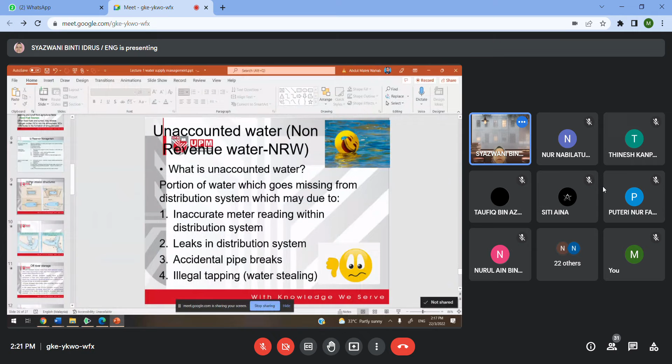Okay. All right. So we are going to look again into the overview of this course. Before we go further, I would like to share a video on one of the common technologies being used for advanced treatment, which is known as a membrane bioreactor.

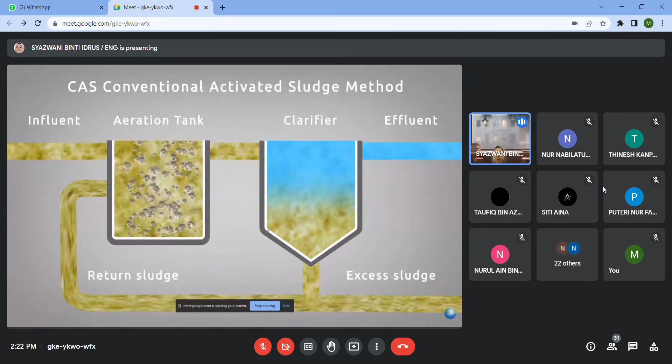Membrane Bioreactor, MBR. The Membrane Bioreactor, MBR, has a number of advantages over traditional wastewater treatment. In the conventional activated sludge treatment method, sludge is separated into solids and liquid in a settling tank. This is called clarification. The innovative MBR technology combines activated sludge treatment with solid liquid separation by means of microporous membranes, in place of the traditional separation by secondary clarification. The MBR modules can be put in a separated tank after the oxidation tank. This configuration is called standard system. The MBR modules can also be put directly in the oxidation tank. This configuration is called compact system.

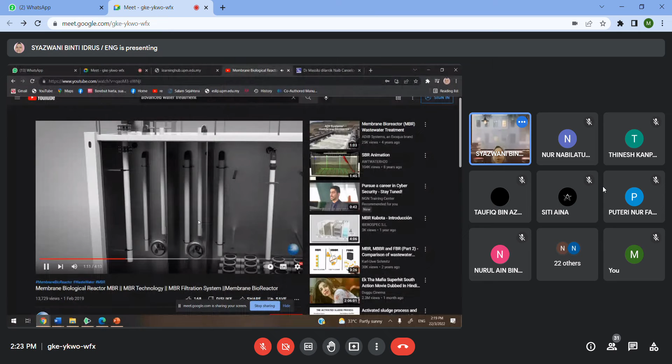The MBR process delivers a highly treated effluent suitable for non-potable reuse applications. The MBR system can be rearranged in a variety of configurations. The typical MBR system includes a rotary influent screen and anoxic, anaerobic, and aerobic tanks for biological treatment, the MBR modules and MBR tank, air blowers for the aeration process and for membrane scouring, a pump set for the MBR permeate suction for sludge recirculation, chemical dosing systems.

Okay, so if we go back to this slide, we can see that this is a conventional treatment method, known as the conventional activated sludge process, the one that you studied in your third year. So, very quick revision, this system comprises an aeration tank as well as the clarifier. These are the secondary treatment processes where you employ the return activated sludge. In the advanced version of this system, they equip it with the membrane bioreactor.

A membrane bioreactor can exist as a submerged system like this, or as a separate system where it is not submerged inside the tank. So this is one of the innovations that have been explored, so that having the membrane inside the tank will improve the quality of the treated wastewater, as well as reduce the suspended solids.

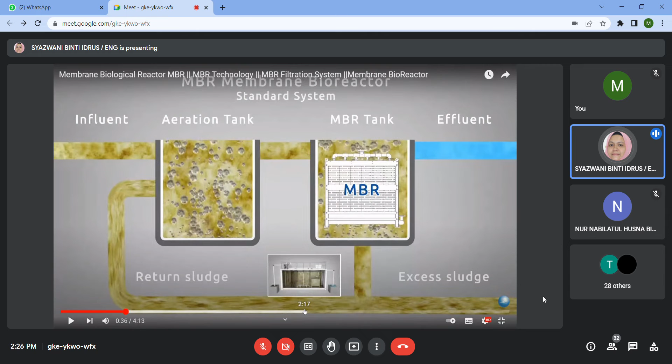Okay, let's see. Let's see what the membrane system actually is.

Conventional activated sludge processes. Flat sheet MBR membrane modules are fully submerged into the mixed liquor inside the tank for direct outside to inside filtration. The modules are made of robust reinforced flat sheet membrane with a nominal pore size of 0.04 micrometer. The membrane separates solids and microbes from the activated sludge. The module aeration system generates an upward water flow and air flux to prevent membrane fouling. This allows extreme efficiency up to 99% in suspended solids removal, delivering highly treated.

So this is the cross section. The one in white is the membrane sheet. When we employ a membrane, the membrane sheet acts like a filter, but with very small pores, so that it can remove not only the suspended solids but also the dissolved solids. The one that we filter out is known as the permeate.

Permeate is the filtered water, the treated water, while the one that cannot pass through the membrane sheet is known as retentate or the concentrate. So later we shall have about 2 weeks of lectures to study only the membrane technology, because the topic is pretty long compared to other topics, but not only on membrane.

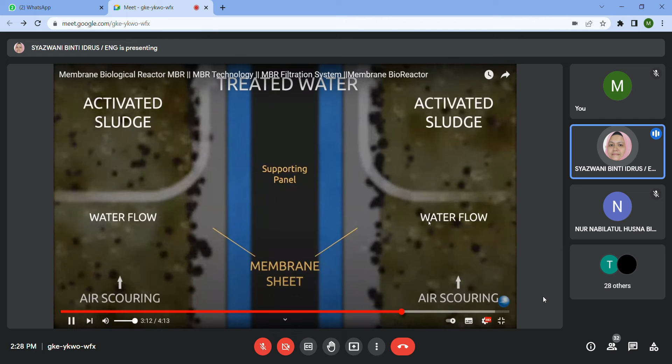Water suitable for reuse. MBR technology offers a number of key advantages over conventional wastewater treatment plants. By eliminating the need for secondary clarifiers and tertiary treatment, a smaller footprint is possible. Higher strength effluents can also be treated. MBR membrane technology produces an improved water quality in the treated water versus conventional activated sludge treatment systems. This not only helps ensure that specific effluent discharge limits are met, but also gives the customer the potential to

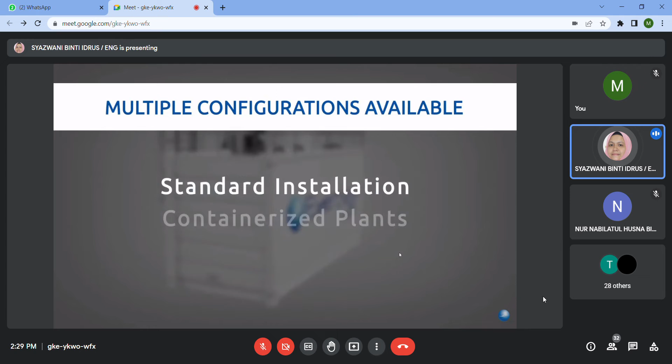reuse the water. In addition to standard installations, MBR systems are available in a wide range of configurations designed to meet your specific needs, such as containerized solutions for remote sites, or retrofit systems to enhance the performance of existing treatment plants. Membrane bioreactor systems offer the latest technological solution to meet your wastewater and water reuse needs.

Okay. Another one is known as moving bed bioreactor. We have studied this before during the 3rd year.

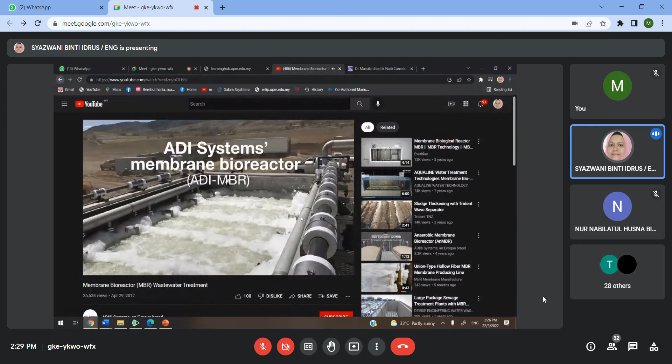Okay. There are three different systems: MBR, MBBR, and FBR. The comparison of the three systems showed different advantages and disadvantages for industrial wastewater applications. Effluent water quality. MBRs show in general a slightly better BOD removal than MBBRs or FBRs. Very fine membranes can even hold back germs so that the water effluent quality is in general better.

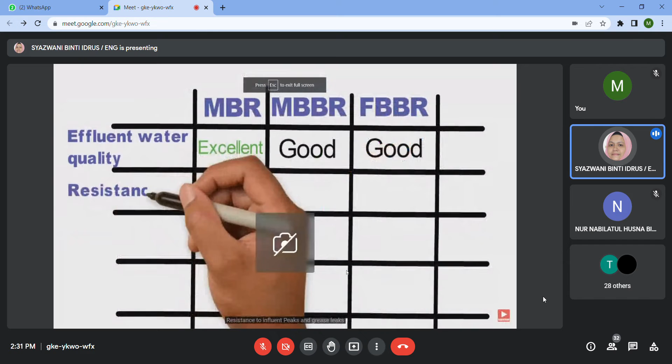Resistance to influent peaks and grease leaks. MBRs are very sensitive to changing influent values. Grease leaks can cause clogging of the fine membranes so that they must be cleaned or replaced. MBBRs are less sensitive than MBRs, although the risk of fill media clogging is high in case of interrupted mixing and grease leaks. Instead, FBRs are very robust and show a very good handling of changing influent values, grease leaks, and interrupted oxygen supply.

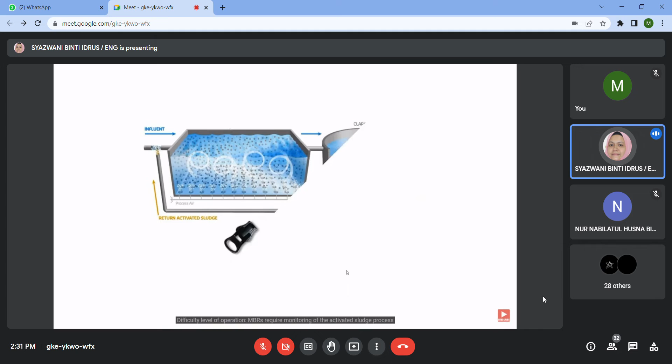Difficulty level of operation. MBRs require monitoring of the activated sludge process as well as backwashing of the membranes in certain intervals. Therefore, their operation can be challenging and higher qualifications are necessary. MBBRs and FBRs are more forgiving, and especially FBRs are easy to operate. Required space. The higher MLSS level of MBRs allows more BOD removal per water volume. Therefore, their required space is lower compared to MBBRs and FBBRs.

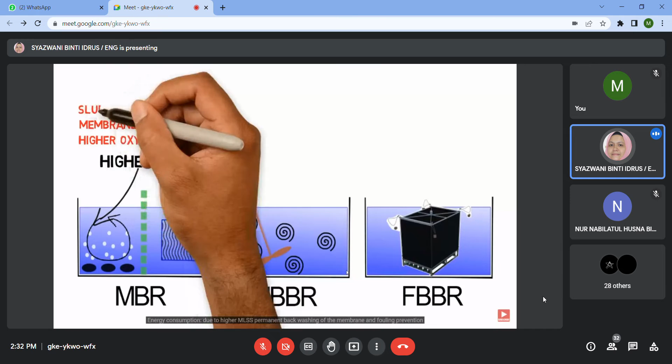Energy consumption. Due to higher MLSS, permanent backwashing of the membrane and fouling prevention, MBRs need a high air volume, thus have a high energy demand and cost. FBRs require less energy than MBBRs because the air supply of the biofilm is installed directly underneath the fill media, which results in a better oxygen intake. Overall cost. The installation costs for all three systems are about the same. However, over time, MBRs are more expensive than MBBRs and FBBRs because of higher operational and maintenance costs.

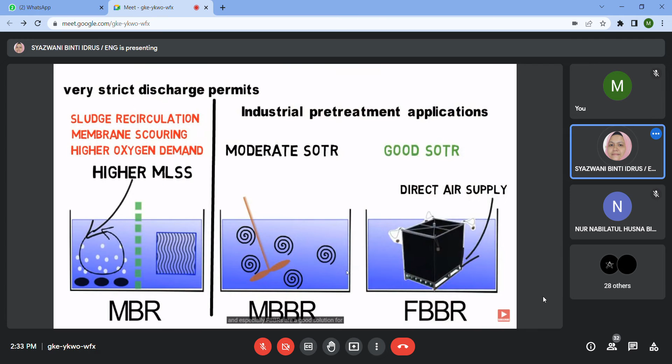All in all, MBRs are a good fit for applications that require a high-quality water effluent. Instead, MBBRs and especially FBBRs are a good solution for pre-treatment of high BOD levels. Their resistance and forgiving design make them suitable for various industrial wastewater applications. Additionally, the easy operation and maintenance guarantee a long lifetime production solution for low cost in the long term.

In case you wish further information or need support with the design of your project, please contact us. Thanks for watching.

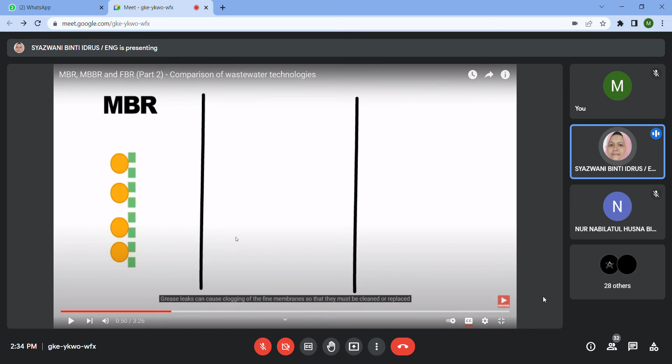So this is one of the best videos, where it compares the three innovations in wastewater treatment technologies. The first one is membrane bioreactor. The second one is moving bed bioreactor, and the third one is fixed bed bioreactor. So what are the major differences? First, we look into the configuration. In terms of configuration and the material used, membrane bioreactor, of course, employs membrane technology.

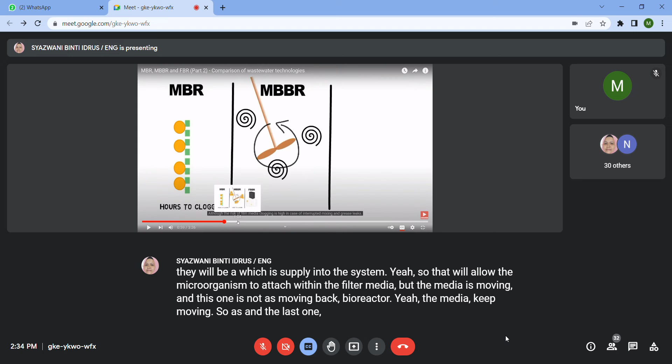The second one is moving bed bioreactor. Moving bed bioreactor doesn't employ membrane; it employs a filter system where at the same time air is supplied into the system. So that will allow the microorganisms to attach within the filter media, but the media is moving. That's why it's known as moving bed bioreactor. The media keeps moving. And the last one is fixed bed bioreactor. Fixed bed bioreactor is a system where the media is not moving.

We culture the microbes within the media, but the media is fixed to a certain place. So as you can see, for the membrane bioreactor, it took hours to cause clogging. For the moving bed bioreactor, in less than one day it will cause clogging. For the fixed bed bioreactor, it will take a few days.

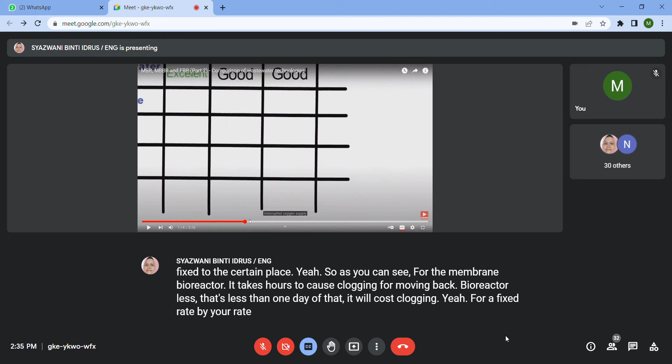Okay, in terms of quality, the membrane bioreactor will produce excellent quality of water as compared to MBBR and FBBR. In terms of resistance, when maintenance is required, the best one is the fixed bed bioreactor. And until now, membrane technology is one of the technologies that can produce a very good quality of water as well as treated wastewater.

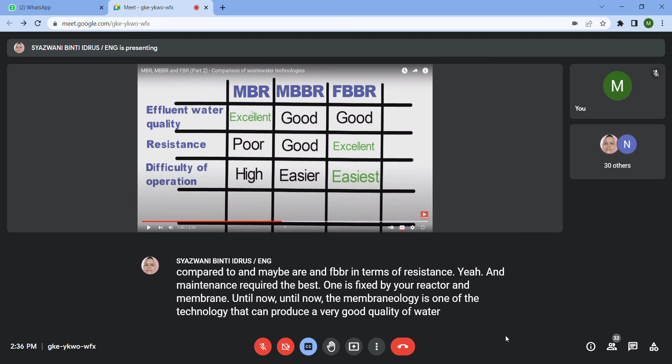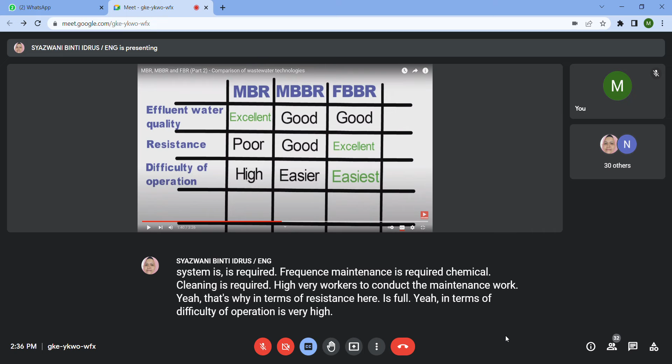Nevertheless, the major disadvantages of employing this system are that it requires frequent maintenance, requires chemical cleaning, and requires very highly trained workers to conduct the maintenance work. That's why in terms of resistance here it is poor. In terms of difficulty of operation, it is very high. It requires a very highly trained person, then only the maintenance work can be conducted.

In fact, at a certain period we have to use chemical cleaning, then only we can remove the pollutants or contaminants that stick within the pore surface of the membrane. Because as I mentioned to you just now, a membrane works like a filter. Jadi macam penapis tu, it's like a filter. So after a few rounds, the contaminants will start to stick on the surface of the membrane. So that's where it requires maintenance.

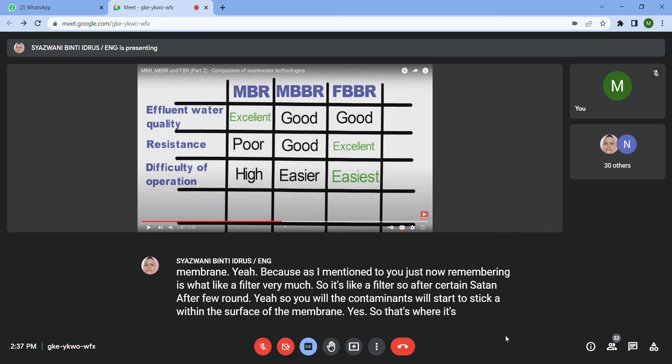As compared to that, MBBR and FBBR are very easy. They are the easiest ones in terms of operation and resistance.

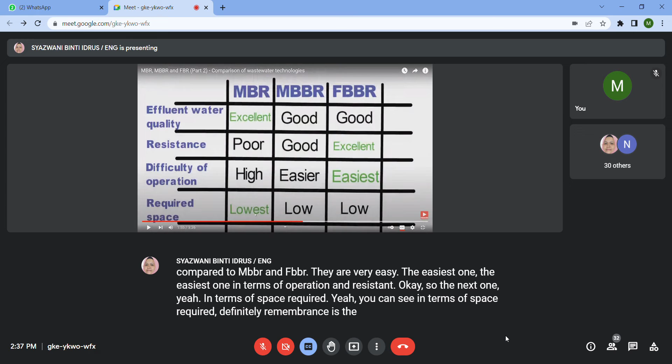Okay, so the next one, in terms of space required, definitely membrane is the lowest one. Comparing between the three technologies available here, the membrane requires the lowest space. But still, because these are advanced technologies, the conventional activated sludge system is still the technology that requires the highest space if we employ the conventional methods.

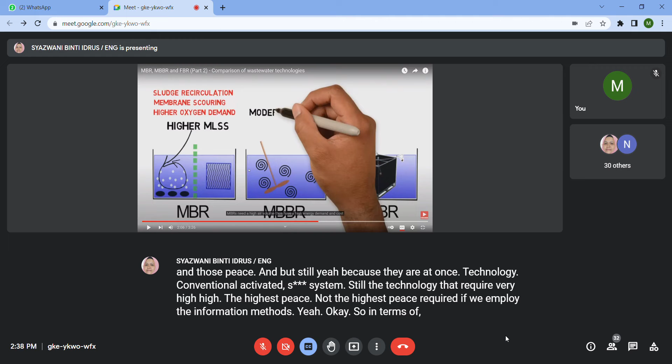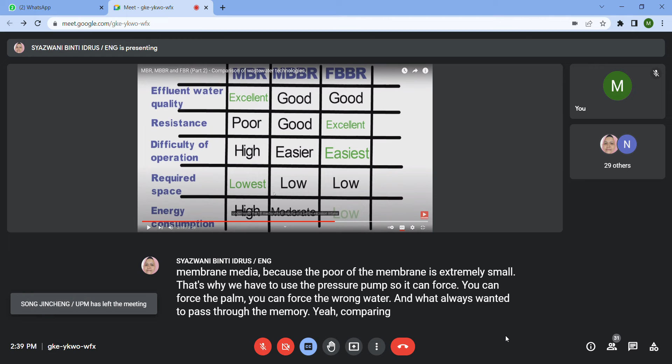Okay. So in terms of energy demand, if we compare energy consumption, membrane requires high energy consumption. You know why? Because when we employ membrane, we have to use a pressure pump. Otherwise, the raw water or raw wastewater cannot pass through the membrane media because the pore of the membrane is extremely small. That's why we have to use the pressure pump so that it can force the raw water or untreated wastewater to pass through the membrane. Compared with MBBR and FBBR, membrane is the highest one in terms of energy consumption.

So this is the overview. We are going to compare in detail. So by the end of this course, you should be able to give the right recommendation based on the existing problem, based on the constituents of the raw water and wastewater to be treated. Okay, all right.

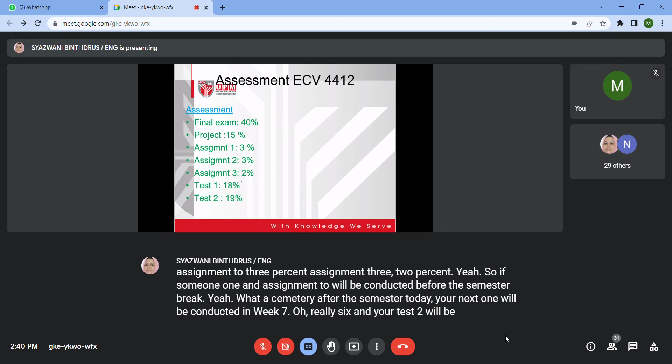In terms of assessment in this subject, we are going to have a final exam, 40%, and a project, 15%, only one project. Assignment 1, 3%. Assignment 2, 3%. Assignment 3, 2%. Assignment 1 and assignment 2 will be conducted before the semester break, while assignment 3 after the semester break. Your test 1 will be conducted in week 6 or week 7, and your test 2 will be conducted in week 11 or week 12. Okay.

So today I'm going to pass you your first assignment. Okay, so a general overview of the reservoir management system. We are looking into the quality. Why we have to care about reservoir management is because we hope that we can preserve the quality of water, not only the quality but also the quantity.

So this is our challenge, your challenge as a future civil engineer, future water engineer, as well as environmental engineer, to look into this issue, so that proper management reduces the impact on the environment and we can preserve the quality of the water.

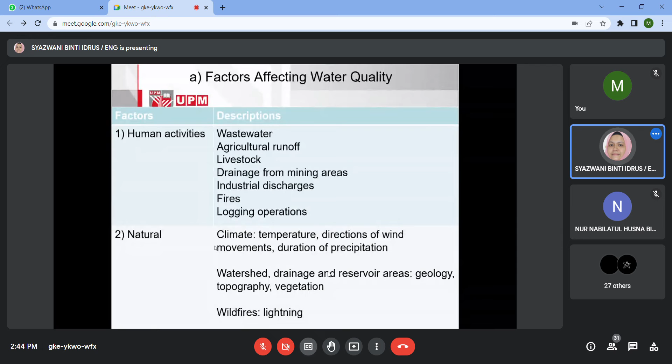Okay, eutrophication is another issue, which relates to nitrogen which we have discussed before, including the nitrogen cycle. The factors that contribute to nitrogen include runoff from agricultural activities, septic tanks, and the residential area. For your information, there are three major elements that can cause eutrophication.

These can enhance the development of eutrophication. The first one is nitrogen, the second is phosphorus, the third is potassium. But this will only happen at the right ratio. Phosphorus is the limiting factor, the major element which can cause eutrophication, the algal bloom. But only at the right ratio to nitrogen can it produce the eutrophication or algal bloom situation.

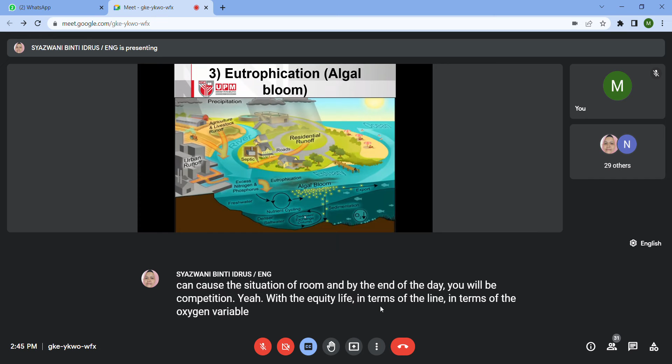So why do we need to put concern on eutrophication? Eutrophication can cause algal bloom situations, and by the end of the day, there will be competition with aquatic life in terms of light and oxygen available in water bodies. That's why runoff, especially from agriculture, is the toughest one, because it contains high potassium, nitrogen and phosphorus from fertilizer.

Apart from that, there's the urban and industrial source, the management of industrial wastewater, the management of slaughterhouse wastewater. What is the current practice of slaughterhouse centers in this country? Many of them don't have any specific treatment method. They just allow the untreated slaughterhouse wastewater to flow into the drain and directly into the river.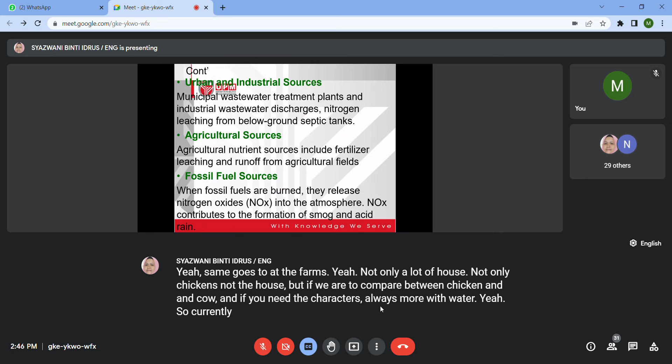Same goes for other farms, not only chicken slaughterhouses but cattle slaughterhouses too, which definitely produce more wastewater compared to chicken. Currently, some of them do have treatment methods, but unfortunately the treatment method only works when there is an inspection from the officer. So this is definitely not a good practice.

The government is also looking forward to allowing food and beverage wastewater to combine with domestic wastewater, so that we can improve the loading rate of domestic wastewater treatment. But they have not yet made the final decision. They are only looking forward to introducing this.

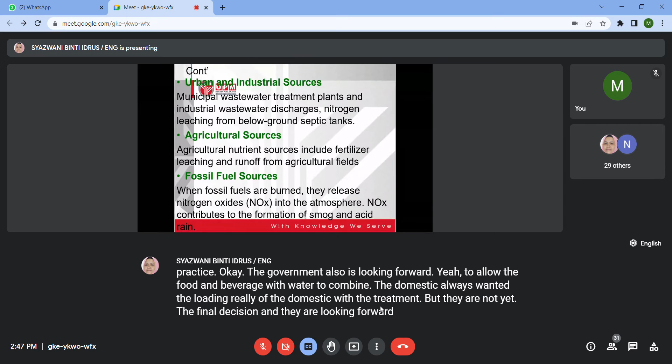Next is regarding reservoir management. We have to provide buffer areas to avoid the cutting of trees and burning processes, so that we can ensure the water security and safety of the reservoir, as well as the source of water. We have to ensure watershed management, avoiding fertilization and industrial discharge, so that we can preserve the quality.

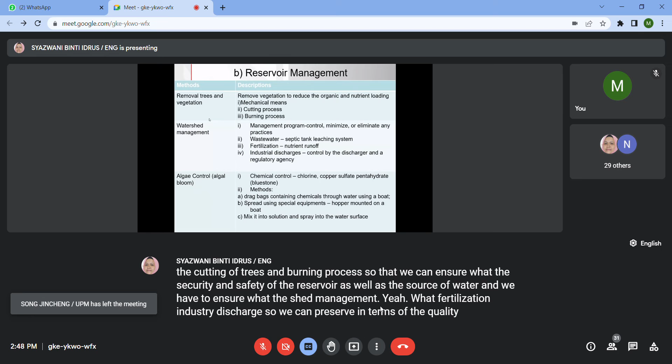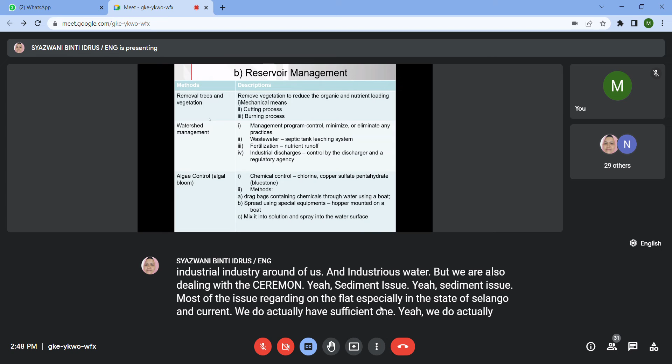There are few factors that can affect the quality of our water storage, not only in terms of industrial runoff and untreated industrial wastewater, but we are also dealing with the sediment issue. Most of the issues regarding flooding, especially in the state of Selangor and Kuala Lumpur, we actually have sufficient ponds to avoid the flooding area.

But due to the inefficient drainage system, due to clogging, this has caused a lot of problems, and the community is the one who has to pay back.

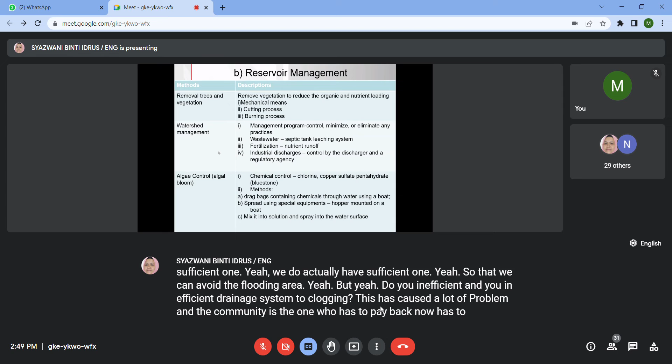Who has to see the damage of the houses due to flood.

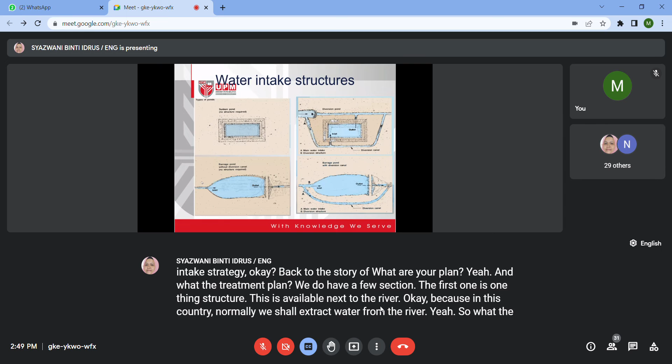Okay, so this is water intake structure. Back to the story of water treatment plant. In water treatment plant, we do have a few sections. The first one is water intake structure. This is available next to the river, because in this country, normally we shall extract water from the river. So water intake structure is normally available next to the river. There are 4 types of water intake structure.

The first one, on my top left, is the sunken pond - no structure required. The next one is with diversion pond. The third one is without the pond but with the diversion. And the last one there is no diversion, only barrage pond.

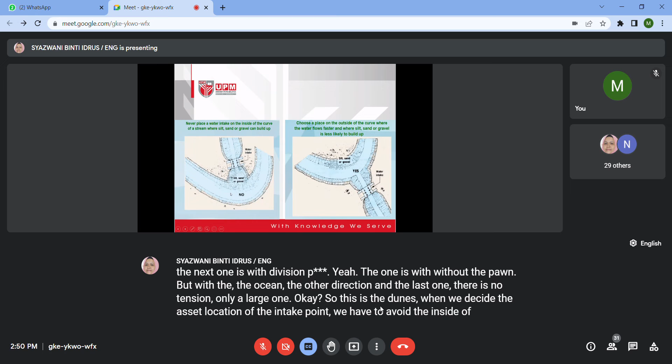Okay, so these are the don'ts. When we decide the exact location of the intake point, we have to avoid the inside of the curve. Why do we have to avoid the inside of the curve? Because this will be the place where the silt, sand and gravel will accumulate. So it's not a good decision to construct a water intake point in the inside of the curve. So imagine this is the river, and this is going to be the water intake point. So these are the recommended points at the right location where you can construct a water intake point.

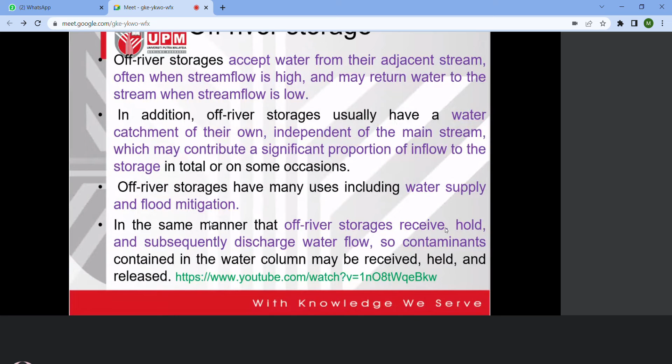Okay, next one is off river storage. Off river storage is the technology or a very good innovation, so that we can preserve the quality of water as well as the quantity of water.

The overview of water treatment system. Today we are not yet into the advanced version, because I think it's better for us to have the overview, and then we can revise what is the water treatment system.

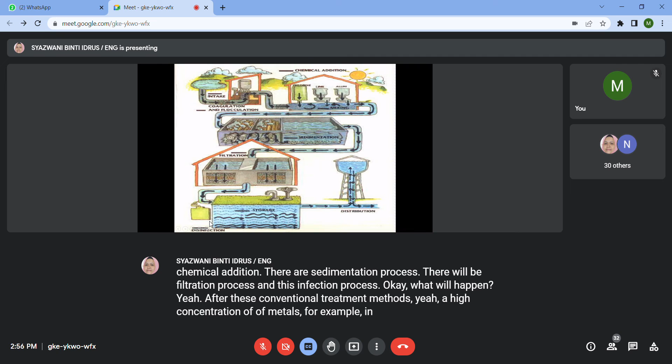These are the overview of the treatment processes which have to be conducted in a conventional treatment system. In a conventional treatment system, there is coagulation and flocculation, chemical addition, sedimentation process, filtration process and disinfection process. What will happen after these conventional treatment methods? There are high concentrations of metals, for example, in treated water. So this is where tertiary treatment or advanced treatment methods are required. So the one that I currently share with you is the conventional treatment process, the most common process that will occur in a conventional treatment plant.

Addition of alum - very quick revision - addition of alum will occur here, so it will form flocs. Flocs will settle to the bottom part. So the role of this stage is to remove the suspended solids.

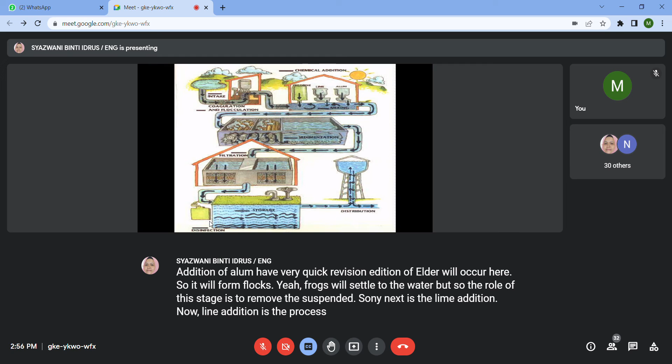Next is the lime addition. Lime addition is the process for adjusting or softening the water. Why do we need to add lime? Because lime can soften the water. Why do we care about softening or hardening the water?

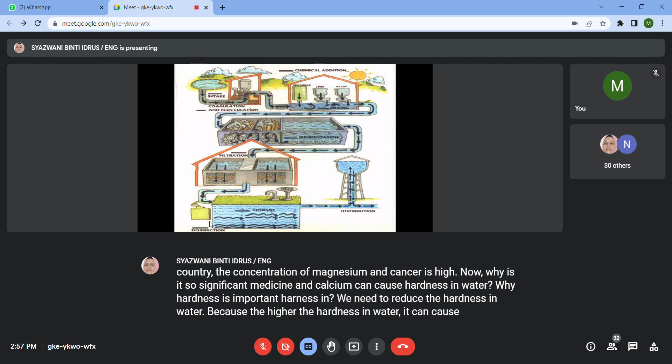Water in this country has a high concentration of magnesium and calcium. Why is it so significant? Magnesium and calcium can cause hardness in water. We need to reduce hardness because the higher the hardness, the higher the soap consumption, and it will take longer to produce bubbles if hardness is too high.

That's why lime is the most common method used, added into the raw water after the coagulation process. We add lime so that the antagonistic effect between the lime and the magnesium and calcium can reduce the hardness of water.

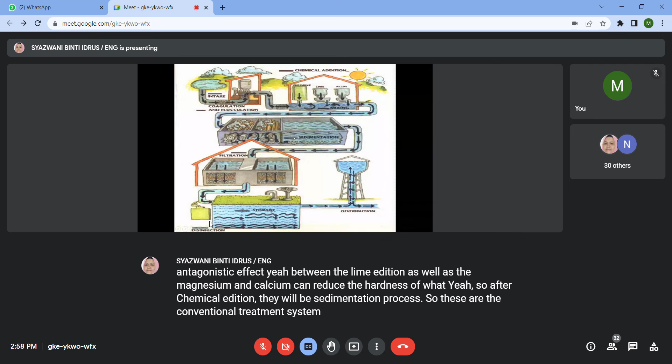After chemical addition, there will be a sedimentation process. In this conventional treatment system, we allow some time for suspended solids to settle to the bottom of the tank. So we have to consider the hydraulic retention time, which is the time we provide for water to stay within the tank without any action, staying calm inside the tank.

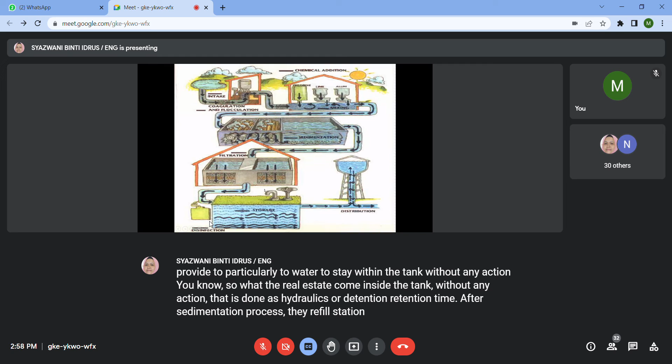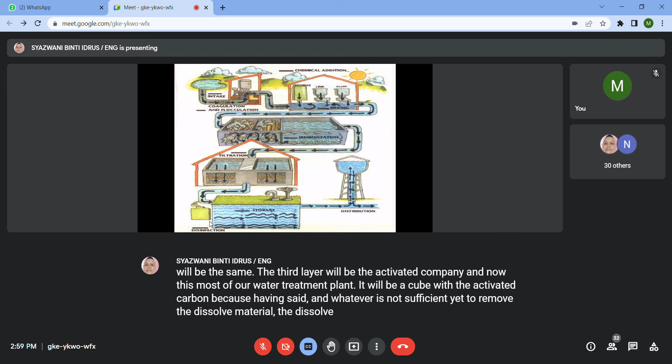After sedimentation, there will be a filtration process. The first, bottom layer is gravel, the next layer is sand, and the third layer is activated carbon. Nowadays, most water treatment plants use activated carbon because sand and gravel alone are not sufficient to remove dissolved material, especially dissolved solids like minerals. Activated carbon is required to adsorb those minerals and ions.

After the filtration process, in this course we shall cover the filtration process in detail, and later I will share with you how to design the activated carbon column filtration.

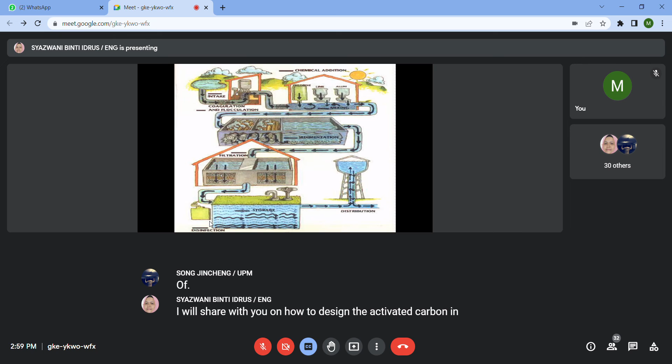After filtration process will be the disinfection process. Disinfection process.

Thank you, Doctor. Do you have any question? No. Okay, all right.

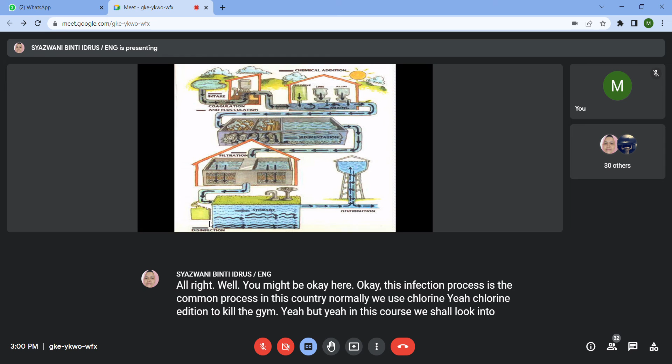Disinfection process is the common process in this country. Normally we use chlorine addition to kill the germs, but in this course we shall look into other methods that can be used to kill germs, not only chlorine addition.

We can also use ozone treatment, or UV treatment, to kill germs after the filtration process. The issue we have to address in this course is what happens after disinfection process, since there are still substances left that require treatment.

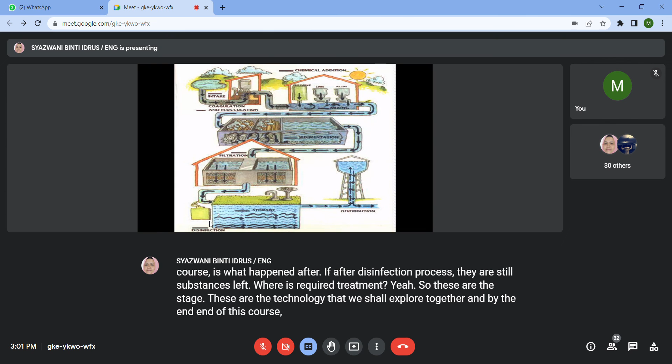These are the stages, the technologies, that we shall explore together, and by the end of this course you should be able to advise people and give recommendations on what is the appropriate technology to use so that we can effectively treat the water.

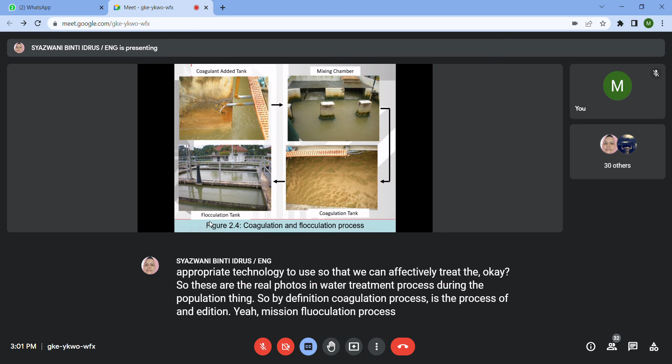These are real photos of the water treatment process during coagulation, in the coagulation tank. By definition, coagulation process is the process of alum or coagulant addition. Flocculation process can be defined as the rapid mixing process, because without rapid mixing, it would be difficult for the alum added earlier to attract the suspended solids to form flocs.

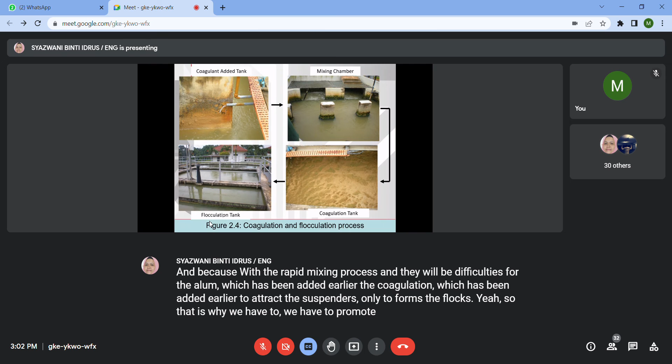That's why we have to promote the formation of the flocs through the mixing process.

Example 1, a simple example for a water treatment plant which treats about 36,000 meter cube per day. Design the volume of the flash mixing tank for flocculation where the detention time is 40 seconds.

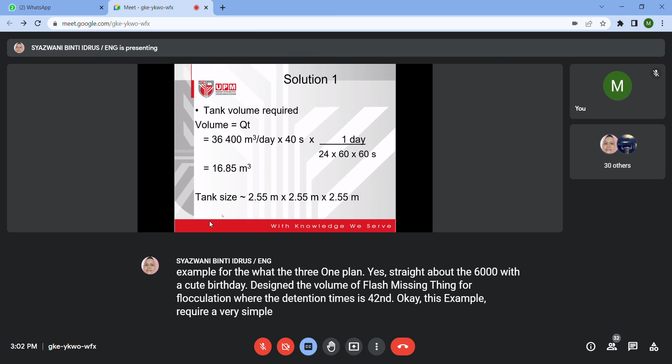This example requires a very simple formula, where flow rate is equal to volume over time. You are given the flow rate and the time, so you are looking for the volume. Solving this equation, you get the volume of about 17 meter cube. These are the proposed dimensions: length, width, and depth.

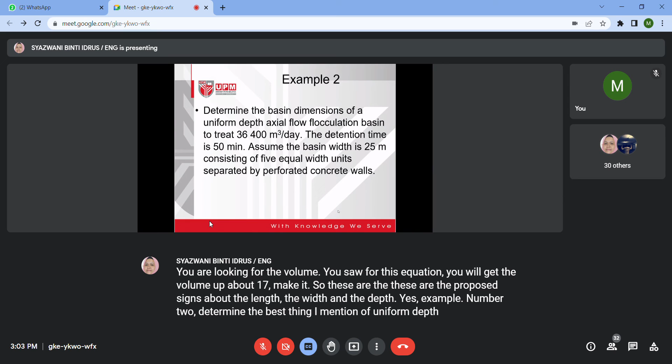Example 2: determine the basin dimensions of a uniform depth axial flow flocculation basin to treat the same flow rate of water, but now the detention time is 50 minutes and the basin width is 25 meters. It also consists of 5 equal width units separated by a concrete wall.

First you need to find the volume based on the given detention time. The detention time is now given as 50 minutes, so this is just a unit conversion, and from that you will get the volume.

Knowing the volume, and you are also being given the width of the basin, so you know that area is equal to volume divided by width, so you will get the area. So the area is the length times the depth. So now you need to propose the depth, say depth is equal to 5 meters. This is a reasonable depth for a tank.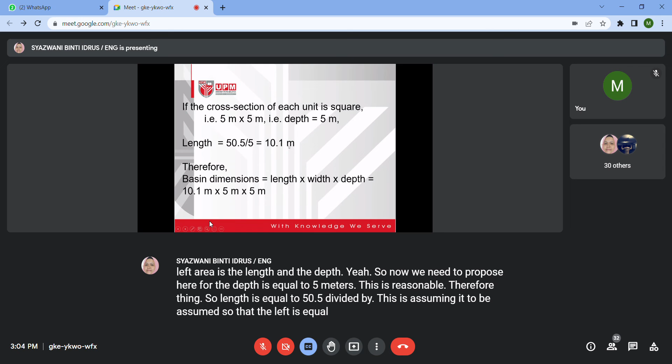So length is equal to 50.5 divided by 5. This is assumed, so the length is equal to 10.1 meters. So therefore the basin dimension, length times width times depth, is equal to 10.1 times 5 times 5. Yeah, very simple.

Okay, this is the revision on how to estimate the population. Estimating the population is extremely important for the design of water and wastewater treatment. Wrong population estimation means that your water treatment and wastewater treatment plant will be under designed or over designed.

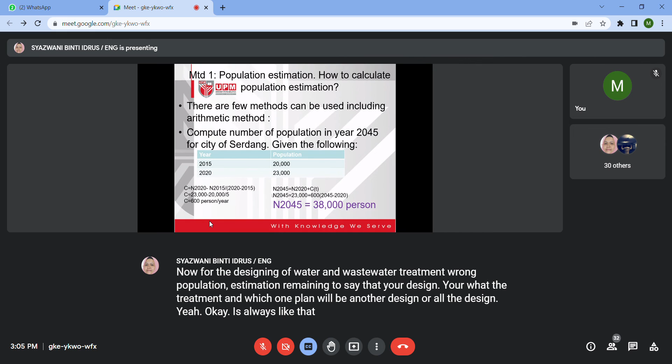It's always like that. Even the treatment plant in Putrajaya, it's been designed for 100,000 population, but it's been 10 years since the operation and it's only 40,000 incoming flow. Okay, so it's always under design.

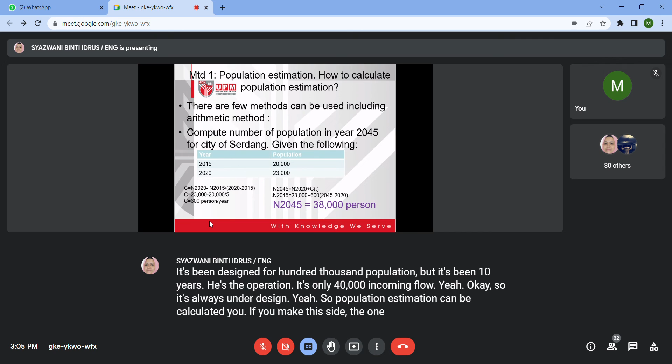So population estimation can be calculated using a few methods. The one that I currently share with you is known as the arithmetic method. Using the arithmetic method, you need to know at least two previous years' population, because you need to know the coefficient. The constant here is important because you need to know the rate of the increment.

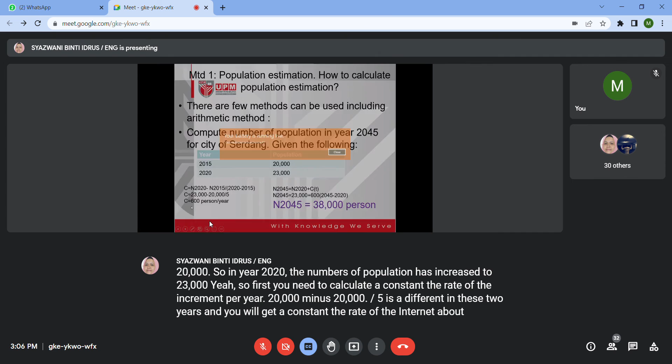For example, in 2015, the population is 20,000. In year 2020, the population has increased to 23,000. So first you need to calculate the constant, the rate of the increment per year: 23,000 minus 20,000 divided by 5. 5 is the difference between these 2 years, and you will get the constant, the rate of the increment, about 600 per year.

Okay, so to calculate the population in 2045, you use the latest population information that you have, plus CT. So N 2020 is 23,000, C is 600, and the difference in terms of years is 25 years. So you know that the population for the city of Serdang in 2045 is equal to 38,000 persons. So this is the first method.

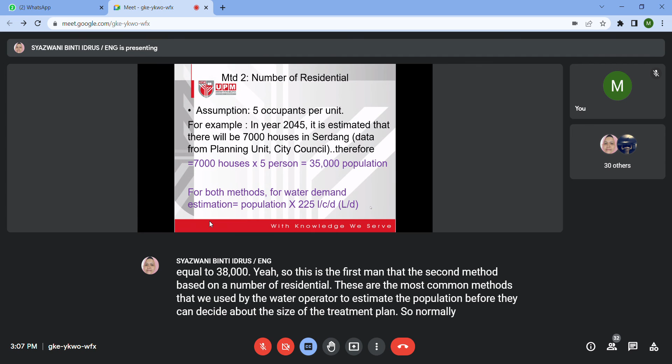The second method is based on the number of residential units. This is the most common method used by the water operator to estimate the population before they decide the size of the treatment plant. Normally they will check in terms of the development, what will be the estimated number of houses after a certain period. For example, if they are designing a water treatment plant for 10 years, they need to know, based on the development plan, what will be the number of houses.

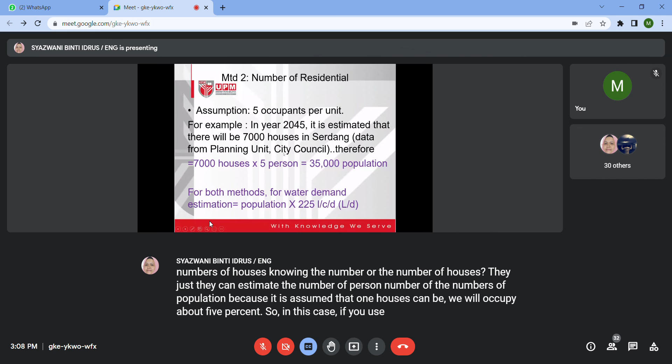Knowing the number of houses, they can estimate the number of persons, the population, because it is assumed that one house will be occupied by about 5 persons. So in this case, using this method, we will get about 35,000 population in 2045, because 7,000 houses times 5.

Okay, for both methods, whether we use the population method or the number of residential units method, water demand estimation is equal to population times 225 liters per capita per day. So this is how to estimate the water demand. These are the fixed numbers to be used, at least at this moment, because these numbers tell us the volume of water consumed per person per day. C stands for capita.

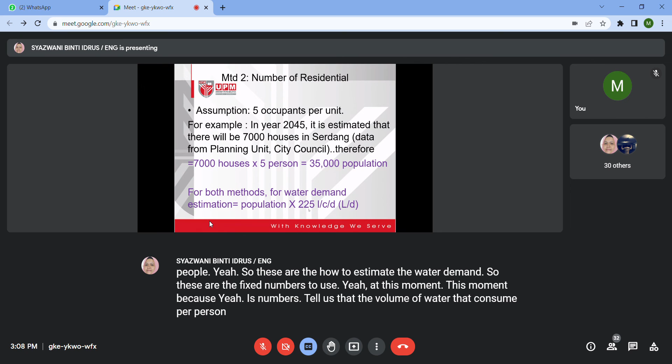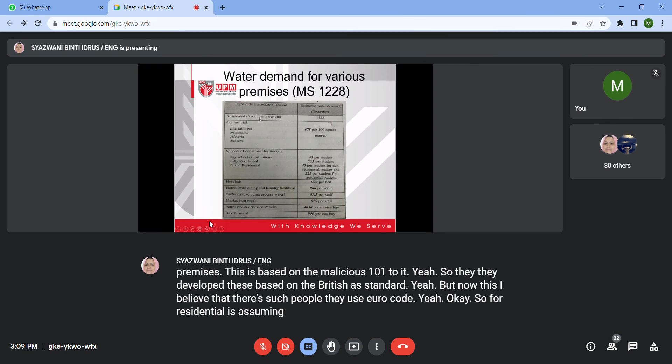Okay, these are the water demands for various premises. This is based on the Malaysian Standard 1228. They developed this based on the British standard, but now I believe the structural people use the Eurocode. Okay, so for residential it is assumed 5 occupants per unit. For commercial areas it is based on the area.

So 675 liters per 100 square meters. Okay, this is 675 liters. For schools, full residential will be 225, for those who stay in the asrama. For half day school it is about 45 liters per student.

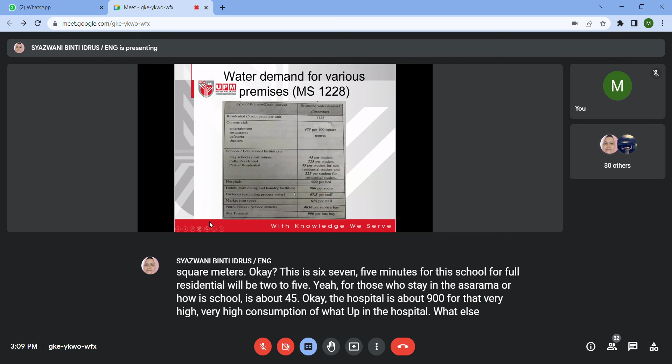Okay, so for hospitals it is about 900 per bed. Very high consumption of water in the hospital. Hotels about 900 per room. Factories about 68 per staff. And the bus terminal is about 900 per bus bay. So this is how to estimate the water demand.

That's why they need to know the plan for the development, because knowing the plan for the development will help the water operator to estimate the volume of treated water required to be supplied to the consumer, so that they can build a suitable size for the water treatment plant.

Okay, this is the story about unaccounted water. What is unaccounted water? Unaccounted water is also known as non-revenue water. How do they know they have the issue of non-revenue water? For the water operator, when they release the treated water, they know this is the volume. But when they check with the billing system, the volume of the water used by the registered consumers does not tally with the water released from the water treatment plant.

The billing does not tally with the water released from the water treatment plant. So it must be missing somewhere. This is known as non-revenue water. This is not only a problem in this country. The issue happens all over the world.

But recently, I had one master's by coursework student. He is actually a staff member at Air Selangor. He did a short study on this issue, and he found that number 2 and number 3 are the major factors contributing to non-revenue water: the second one is leaks in the distribution system, and the third one is accidental pipe breaks.

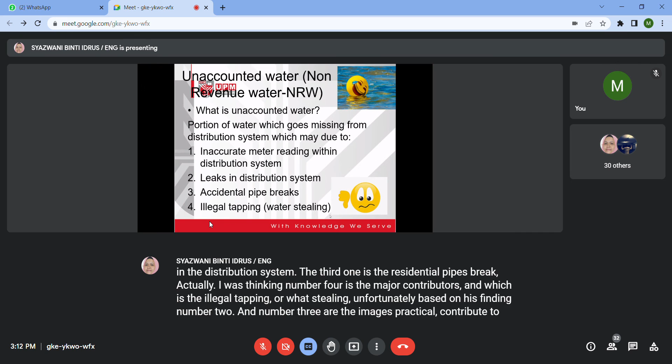Actually, I was thinking number 4 is the major contributor, which is illegal tapping or water stealing. Unfortunately, based on his finding, number 2 and number 3 are the major factors contributing to non-revenue water. Actually, we have 4 major factors, but number 2 and number 3 are the major contributors to unaccounted water. Okay, all right.

Here, I would like to open the discussion. I have 6 topics here, and maybe we can spend about 15 minutes to discuss this, only to address the point. How many of you? Currently, we have 31 students and we have 6 topics here. 30 divided by 6, 5. Okay. Can we have 5 or 6 students per group?

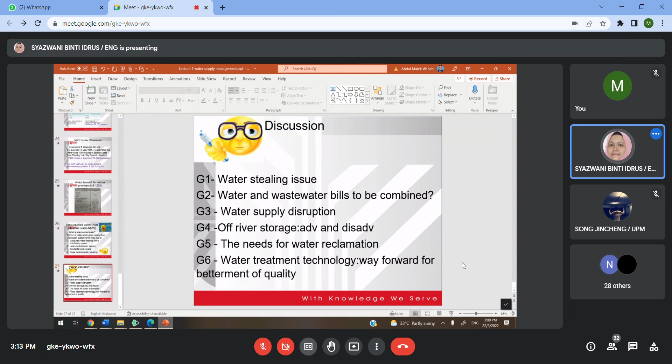You don't have to worry about forming a group. This is going to be a very short discussion. You are going to have another platform to discuss this topic. Ainin, Sophia, Hanis, Israf, Jessica, Firdaus, and also Amirul, you will be in one group, the first group, with the first topic on the water stealing issue. Repeat, Ainin, Sophia, Hanis, Israf, Jessica, Firdaus, and also Amirul, the first group. The second group, Ashraf, Muhammad Roshdi, Hakim, Husni Hakim, and also Nazri.